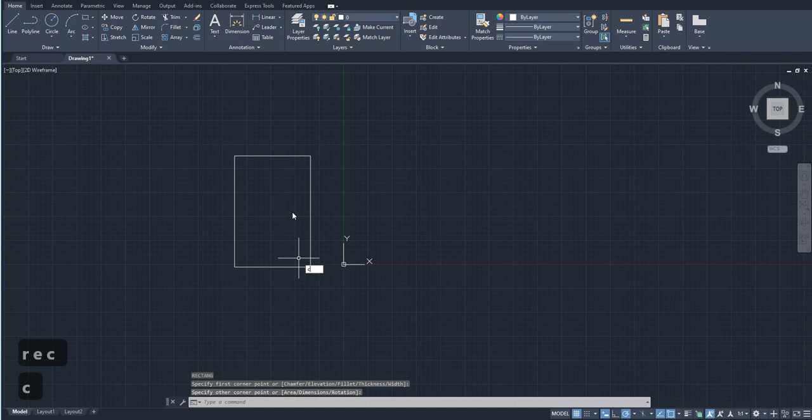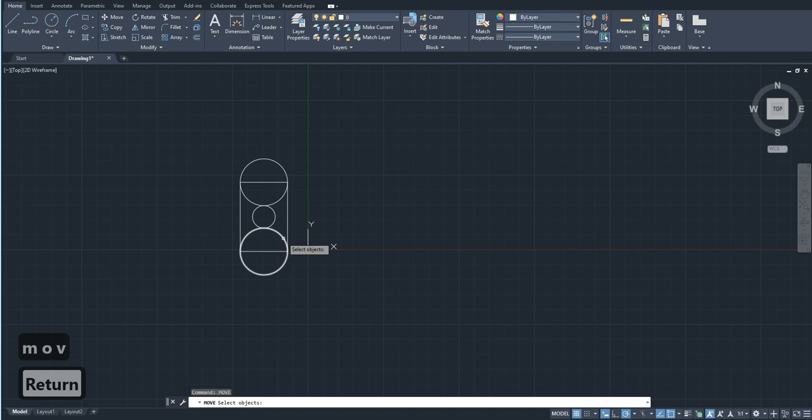To show you the first command, move, I'll create a random object on screen. Say I have this object and I want to move it. What you can do is select this command from here, or enter the command using the keyboard: move. It's asking me to select the objects. I select them, then press enter or spacebar.

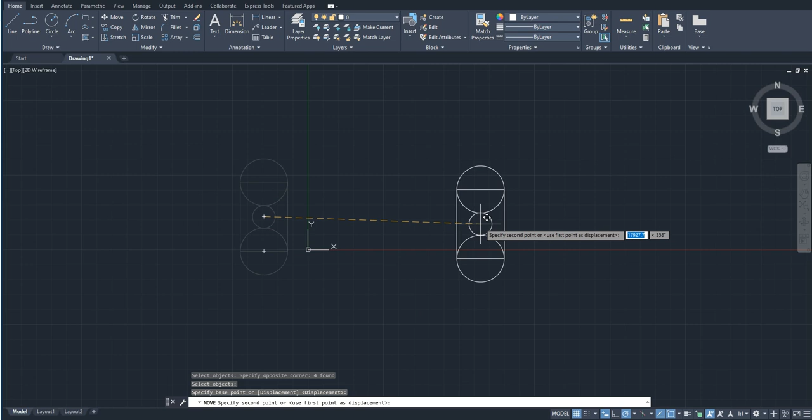AutoCAD assigns similar function to spacebar and enter, so you can use either. I personally prefer the spacebar, so I press it, and now it's asking me to specify the base point. Say I specify the base point as the center of this whole figure, and I can move the object wherever I want. So this is the move command. Just press escape to end it.

The next command is copy. It's pretty similar to move. I select it from here, or enter it, select the objects, press enter, and specify the base point. The only difference between move and copy is that copy retains the original object.

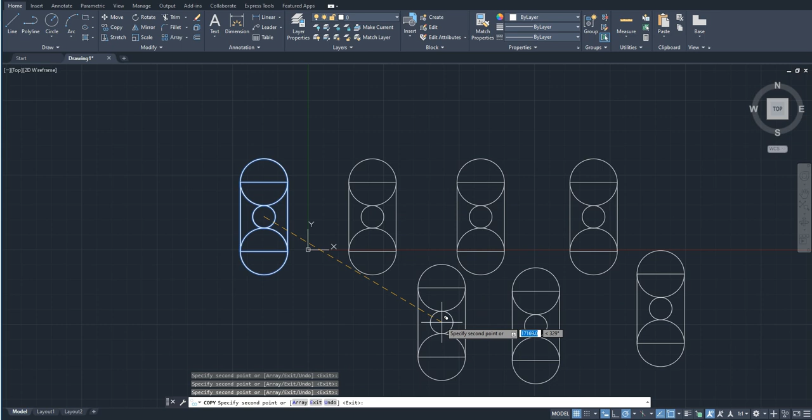So you can copy this object as many times as you want. I'm just going to press Ctrl+Z.

I'm going to show you another use of the copy command. I'll activate it again, select this object, press enter, and show you the array command. First I'll specify the base point. I'm sorry, I messed it up. I'll use the copy command again and specify the base point.

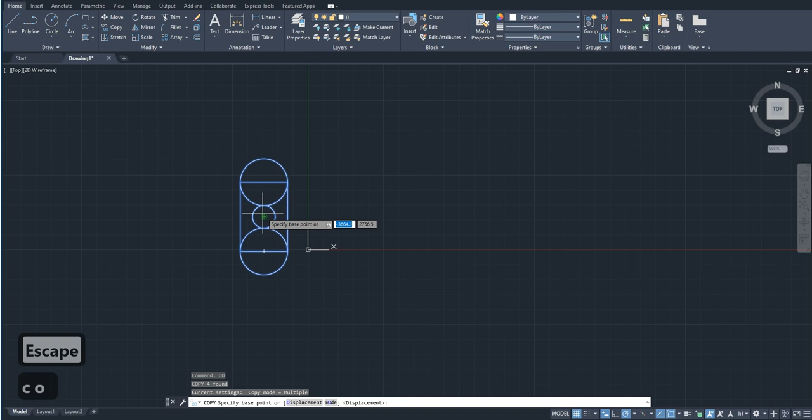Now I'm going to start the array command. It's asking me: copy, specify second point or array. I'll show you what array means. For that, I press enter. It's asking for the number of items to array.

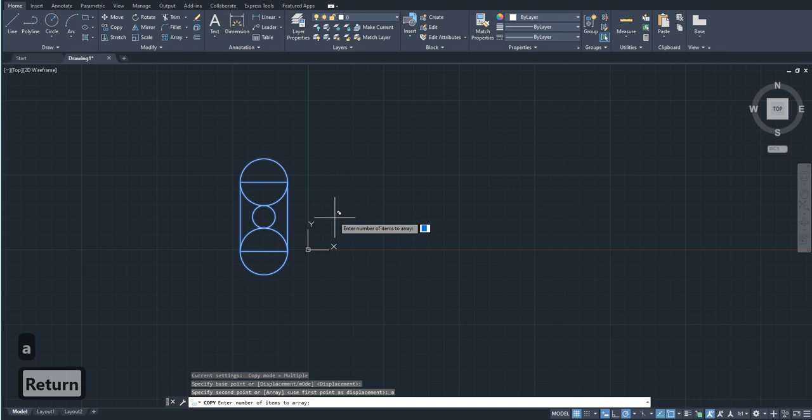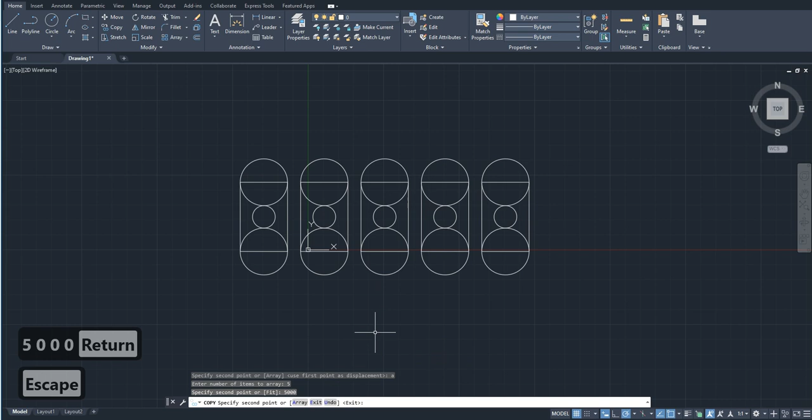Suppose I want 5 different copies of this object, so I enter the number 5. You see, 5 different objects have appeared. The fascinating thing is the distance between these objects remains the same, which I can enter manually as, say, 5000. So now we have the copy of the same object 5 times, equally distanced at 5000.

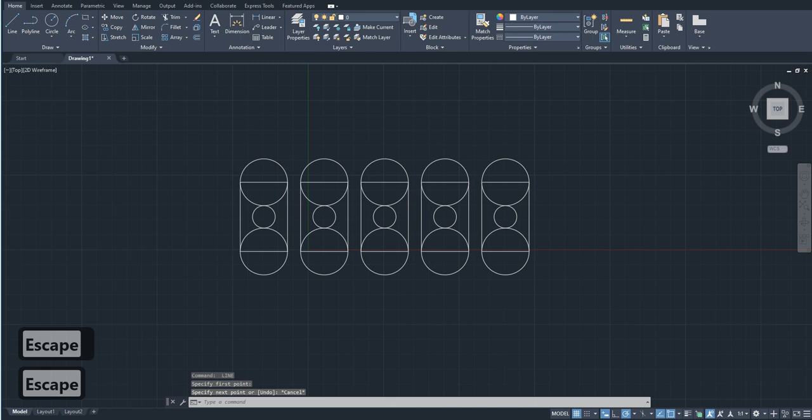You see the distances between the base points. For example, between these were the two base points of the object, so the distance is between the base points and not between the lines. That's how the array command works in AutoCAD.

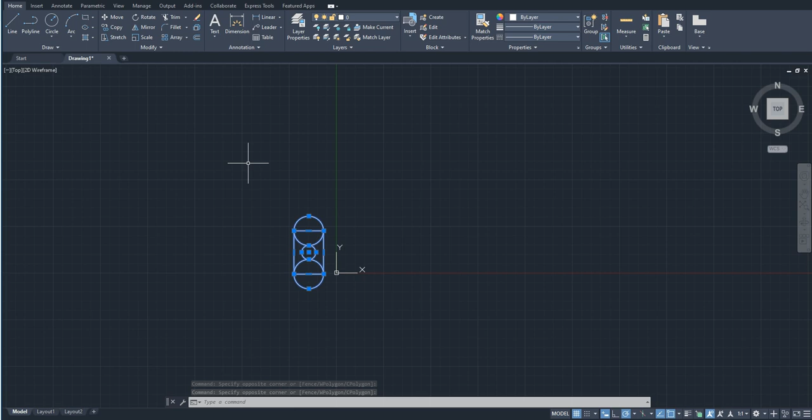The next thing I'm going to teach you is the rotate command. You can either select the object first and then select the command, or select the command first and then the object—it works either way. So I select the objects I want to rotate, then click the rotate command.

It's asking me to specify the base point. Say this, and you see I can rotate this object however I want. Say I rotated it to this. Now I want to make it horizontal again. Of course I could use Ctrl+Z, but suppose I want to make this particular line horizontal in this object—how do I do that?

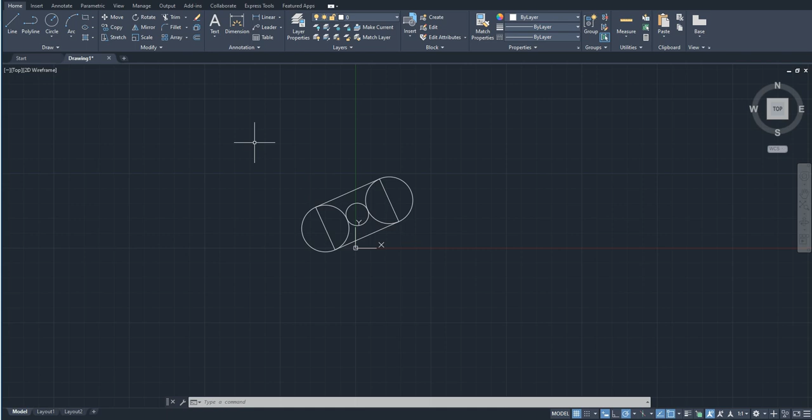Using the rotate command, I select this, enter rotate, select this base point. You see, no matter how hard I try, the polar tracking isn't working, because this object is rotated on a different axis. So now I'll have to enter a reference line.

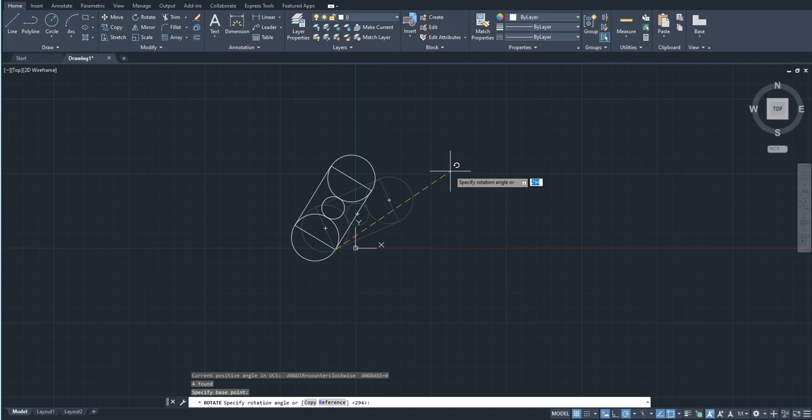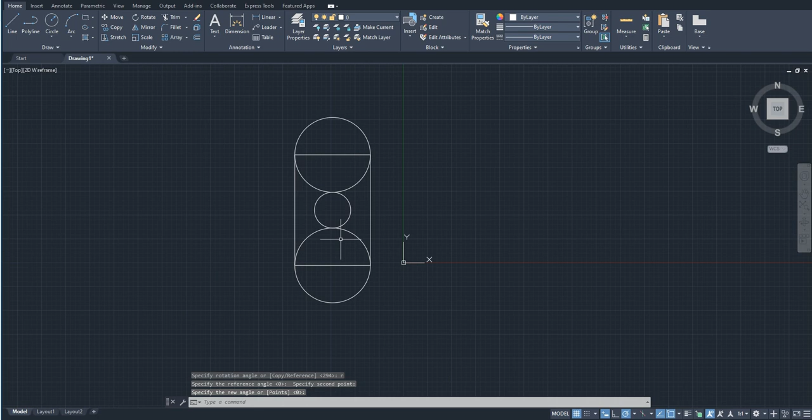For that, you just press R and press enter. It's asking me to specify the reference angle. Say I specify the reference angle as this. Now I can rotate my object according to this line, and now we have the object finally horizontal. That's how the rotate command works.

The next command I'm going to show you is the offset command.

The offset command is this small icon over here. This is my favorite command, I use it a lot. It helps to create concentric circles, parallel lines, and parallel curves.

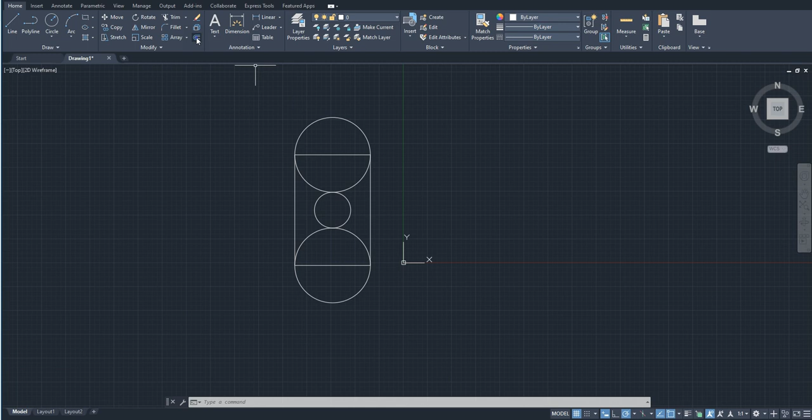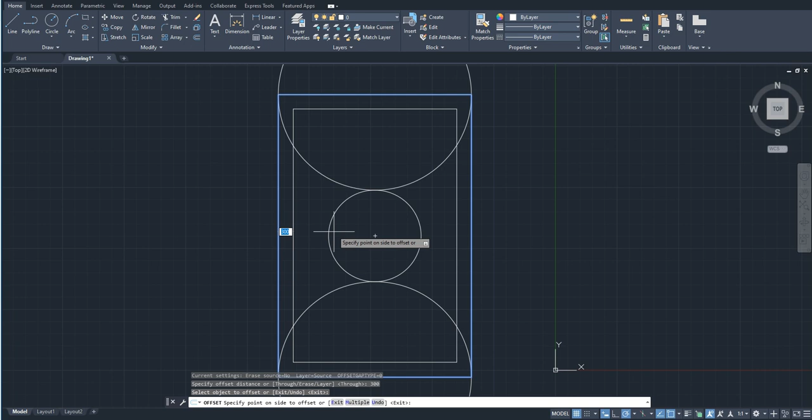So I'm just going to select this, and it helps to create an offset. Say I want a similar rectangle inside this rectangle at a distance of 300. So I specify the offset distance as 300 and press enter. Now if I select this object and hover my mouse inside this, another object is going to appear at a distance of 300 from the original one.

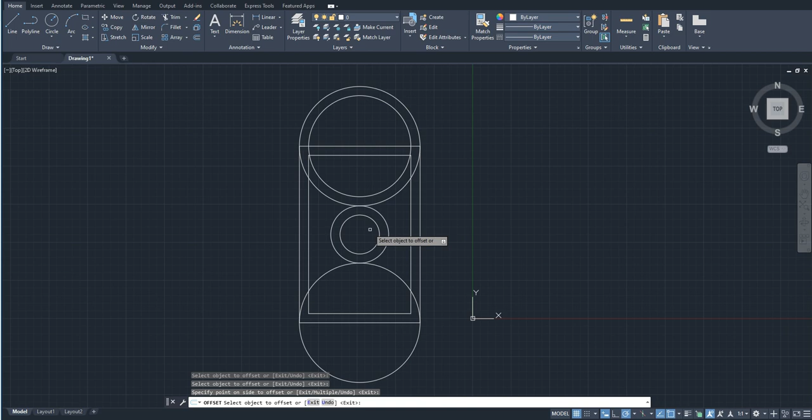And if I hover the mouse outside this object, it's going to offset towards the outside. So I can offset rectangles, circles, and basically anything. I can even offset lines, for example this particular line. If I use the offset command on this, we can also offset lines over here. I can offset it as many times as I want.

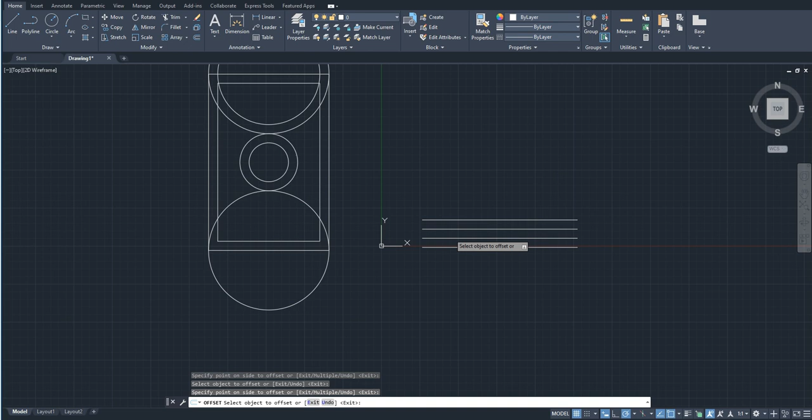The second thing I'm going to show you about the offset command is the 'through' option. For example, I have a line parallel to this particular line, and I enter the offset command, and specify the offset distance as through. For that I just enter T, enter, and it's asking me to specify the object, say this.

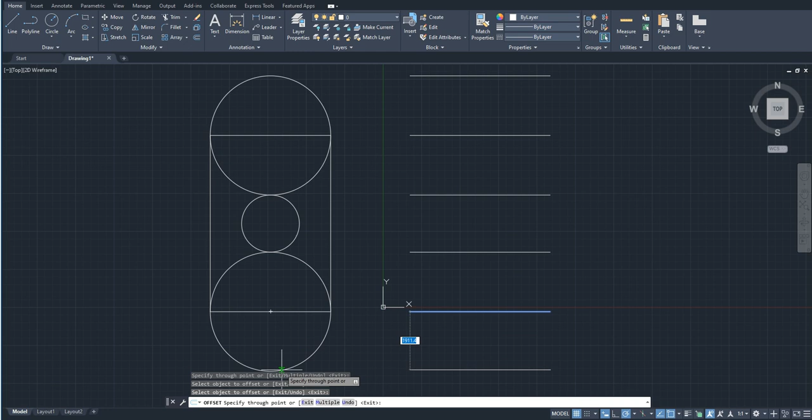Now I can select the object and specify the distance on my own, like this. So this is another use of the offset command, it's called through. That's all about the offset command.

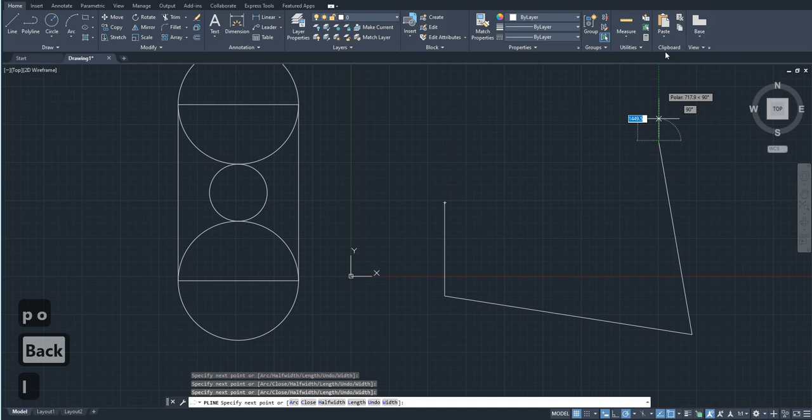The next thing I'm going to tell you about is polylines. We already discussed polylines, I just entered the command for that, P line. The offset command also works for polylines.

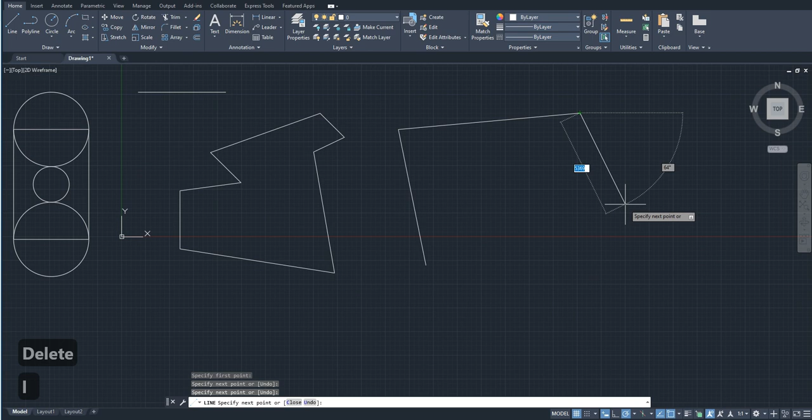Likewise, it works for basically any objects, but say this line is not a polyline, these are different lines. For example, I make a similar shape using lines, and then try to offset this. I'm going to have to offset it one by one. So just make sure that whatever object you're offsetting, if you want the complete offset of that object, it has to be a polyline or one singular object. That's only when the offset command works that way.

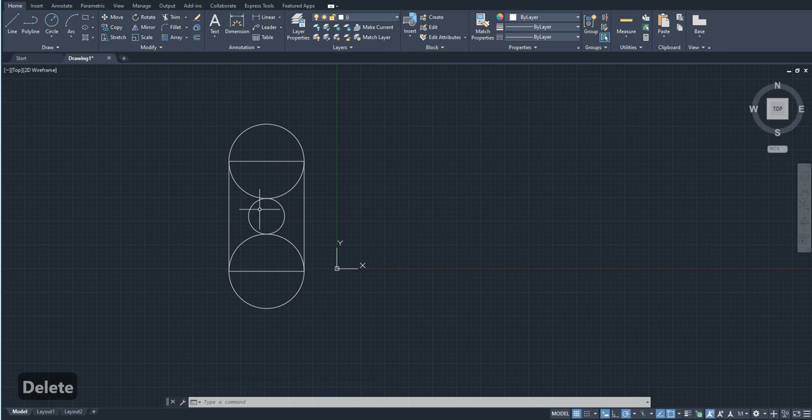The next thing I'm going to show you is the command trim. Let me just draw a figure. Let's say I want to trim these 3 lines, and I'm going to do it in one go instead of selecting this, clicking the endpoint, and putting it here - it's going to be a tedious process. So instead I'm just going to use the command trim. For that you can either go over here and click the command trim, or just enter TR, enter.

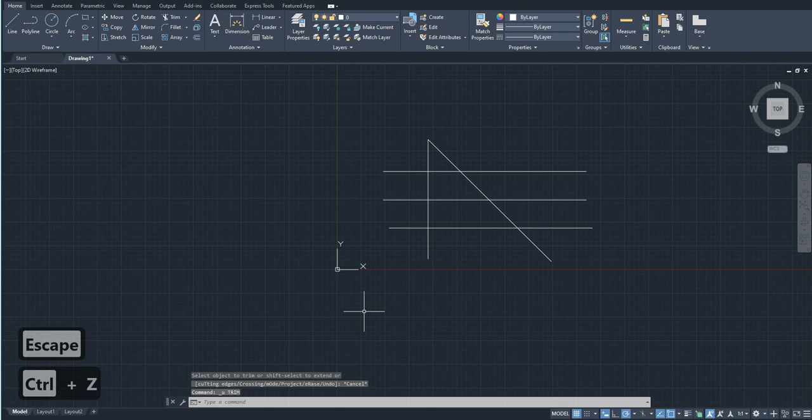Now my version of AutoCAD is AutoCAD 2022. If you're using versions below 2022, you're going to just have to wait a little bit. For people using AutoCAD 2021 and above, they can simply trim this using these commands - you can hover over the lines and it's going to trim them for you. For people using AutoCAD below the 2021 versions, don't fret, I'm just going to enter the command TR, enter.

For previous versions of AutoCAD, if you just enter T, enter, that's how the previous versions work. If you just enter the trim command, it's going to work like this: you're going to have to select the object from which you want to trim, or the objects you want to trim. So I'm just going to select these 3 objects, press spacebar again, and then trim these objects. That's how trim in AutoCAD earlier versions works.

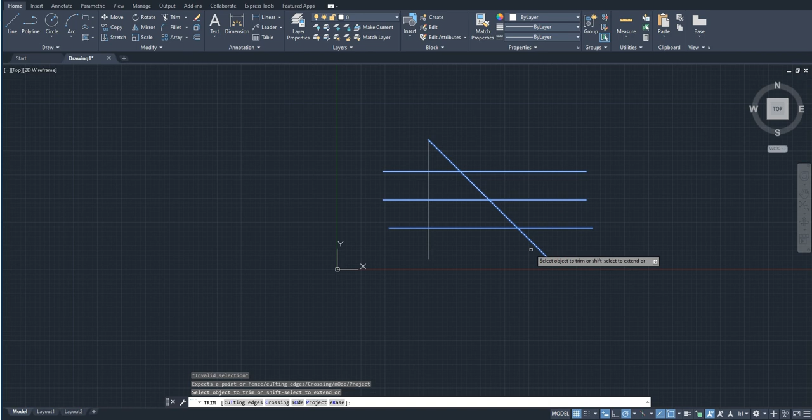But I'm going to show you another useful thing that the earlier version has. For example, I want to trim these particular lines over here, not these lines but the whole line. So I'm going to select the line from which I have to trim and the lines which are to be trimmed. I'm not going to select this particular line. Now I just use this command - you see, I don't have to trim this side and this side separately, it just trimmed the whole thing on its own. It didn't consider this particular line while trimming. That's the advantage of previous versions. So that's how the trim command works.

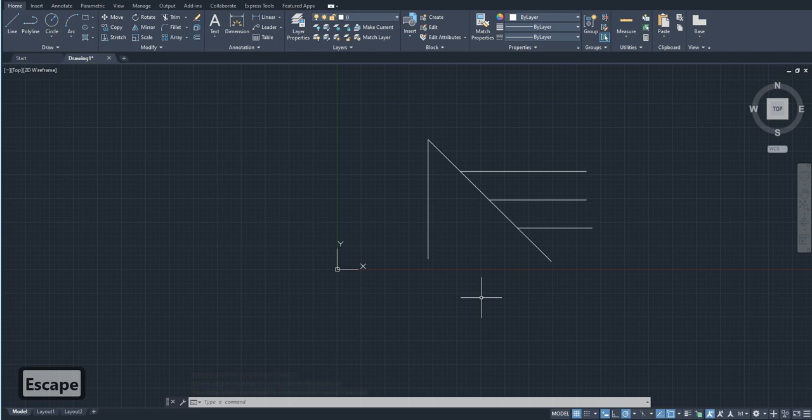The second thing I'm going to teach you is the command extend. For that you just select this, or you can use the command extend from here. It's asking me to select the objects to extend. I select these objects and just extended them to this particular line. So that's how the command extend works.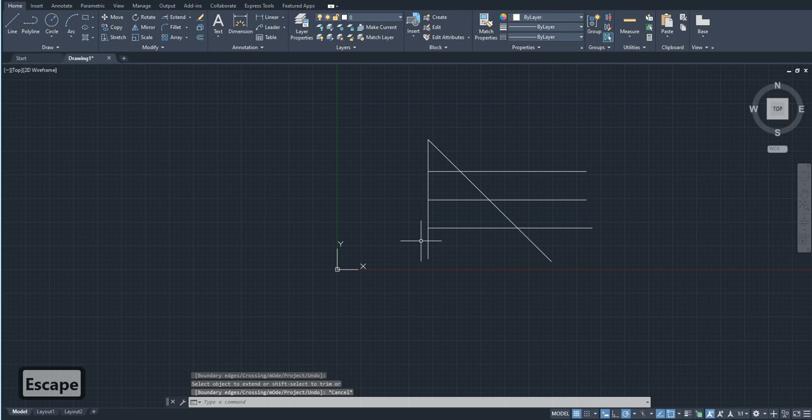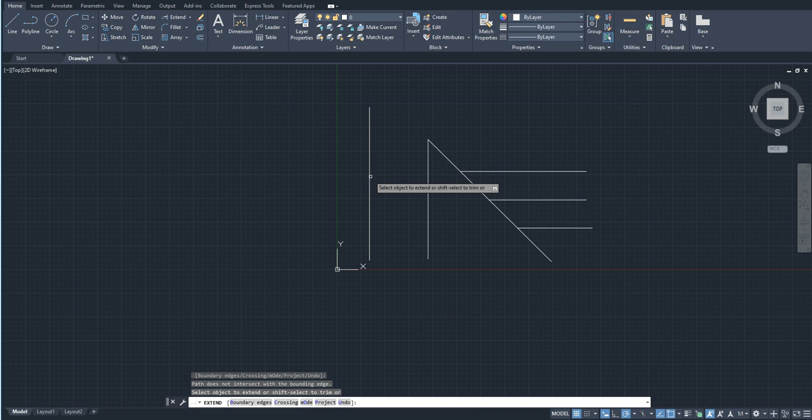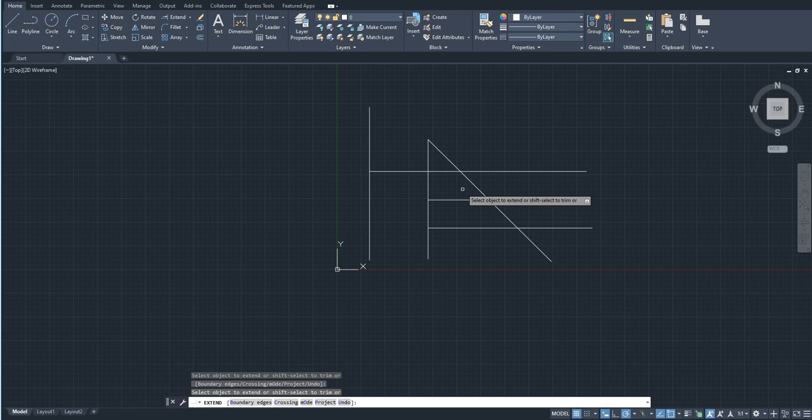But I'm just going to have to press Ctrl+Z to show you another application. Suppose I want these lines to extend till over here. For that I just select these lines, use the command extend, and select the object, I just select these lines, use the command extend, and select the object like this while double pressing it. So that's for the trim, and that's how the extend command works.

I think it's fairly easy. The next command I'm going to be teaching you is the command mirror. For that I'm just going to draw a random object, which is a rectangle, and another rectangle and a line.

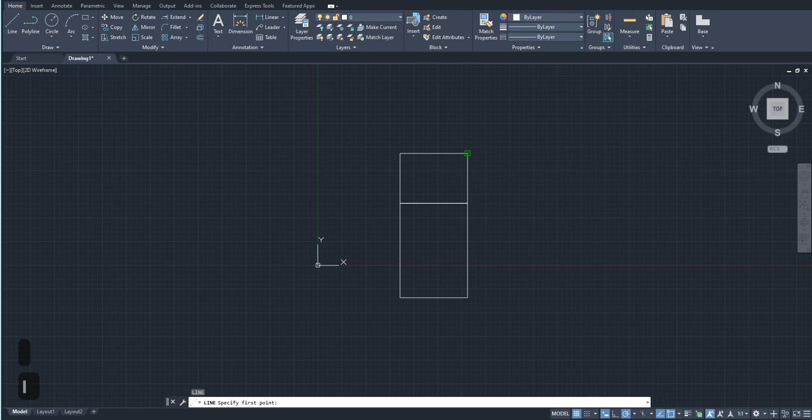Say I have this particular object and I want a symmetrical copy of it, basically a mirror image of this object. For that I just select this object and click on the command mirror.

It's asking me to specify the first point of the mirror line. Remember, if you're standing 5 centimeters away from the mirror, the distance of your reflection from you is going to be 10 centimeters. So if I want the distance between this object and its mirror object to be 5 units, the distance of the mirror line has to be 2.5 from here.

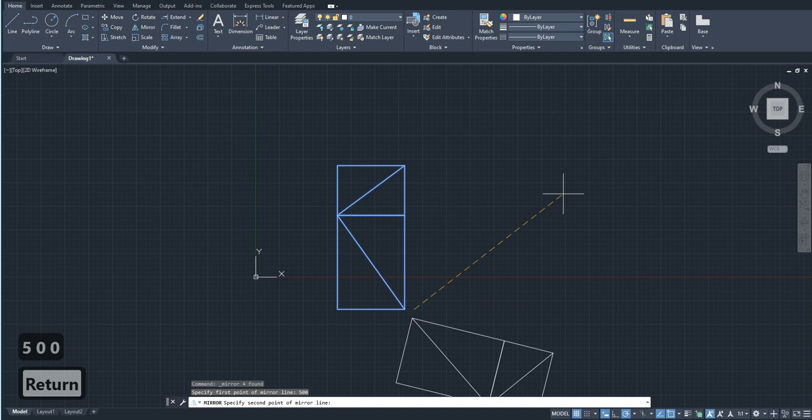Say I want the distance to be 1,000 units, the distance of the mirror line from this object has to be 500 units. So I hover my mouse over this area, click, enter 500, press enter, and you see the mirror line can go in different directions.

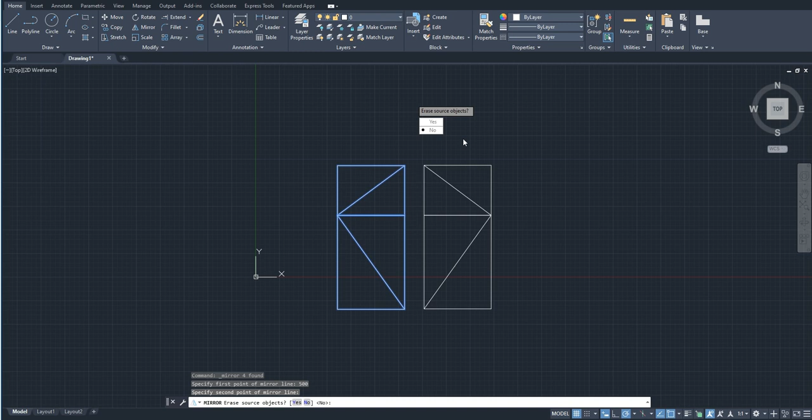I want it to be horizontal like this. It's asking whether to erase the source objects, and I just press enter because the command no has already been selected by default. That's how the mirror command works. You just have to imagine you're placing a mirror in front of an object.

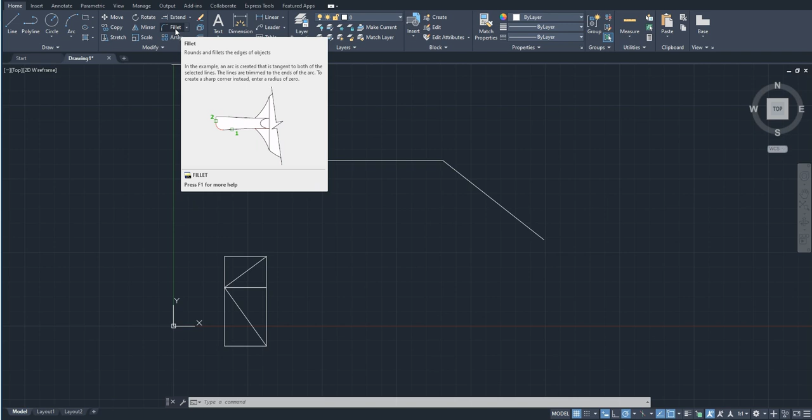The second thing I'm going to teach you is the command fillet. I'm going to draw two different objects, for example this line, and show you what fillet does. Fillet rounds and fillets the edges of objects, basically changing the edge of the object into a round shape.

I'll select this command. It asks me to select the first object, then the second object. If I zoom in, it did nothing, but that doesn't mean the command didn't work — it's because we didn't enter any radius. If I use fillet again, select my first object, and it shows select second object or radius. If I enter the radius to be 500 and select my second object, a curve appears.

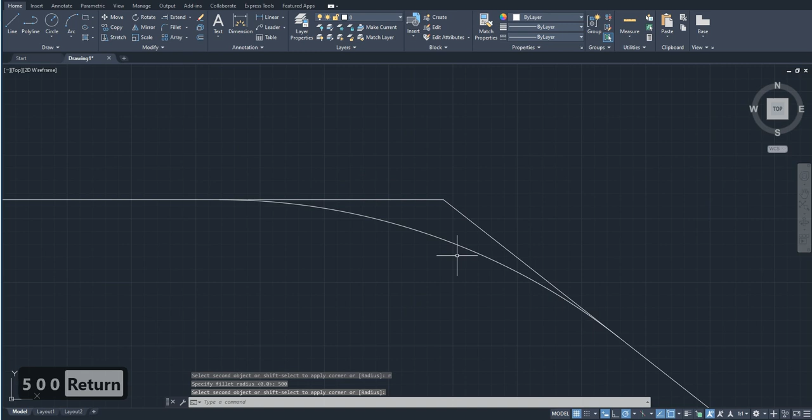Now suppose while creating this curved object I wanted this particular line gone — I only wanted the edges of this object to be rounded. So I erase this arc and enter the fillet command again.

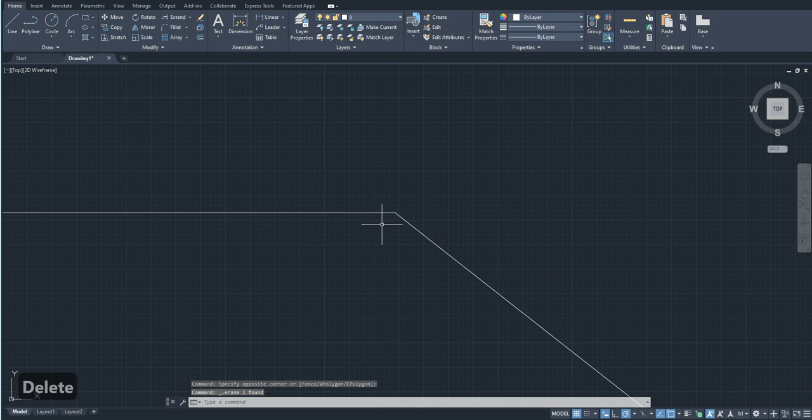This time there are 4 different options: polyline, radius, trim, and multiple. For now I'm going to use the trim command, so it's asking me to enter trim mode.

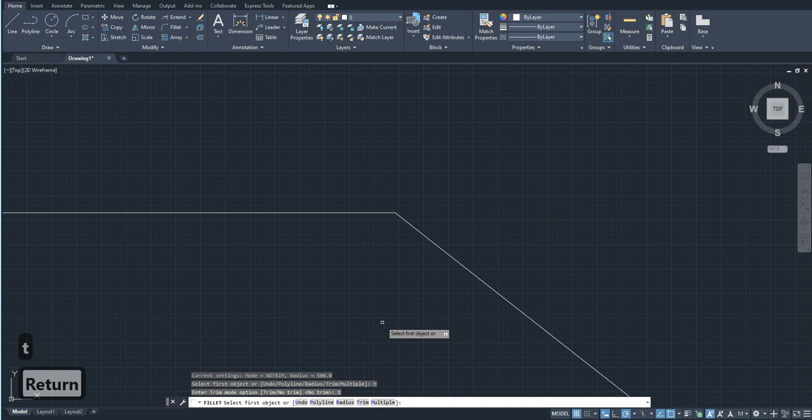If I enter T and enter, let's see what that does. I select the first object and the second object, and you see the corner that was appearing is gone now. That's how the trim command works.

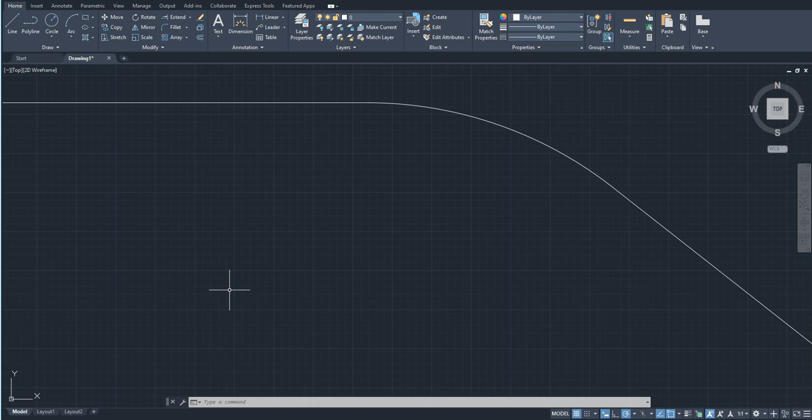Some people may already have the no-trim command activated, so I think you understood how that is. Just press Ctrl+Z again, and I'll show you other things about the fillet command. I enter F, enter, and it's asking multiple.

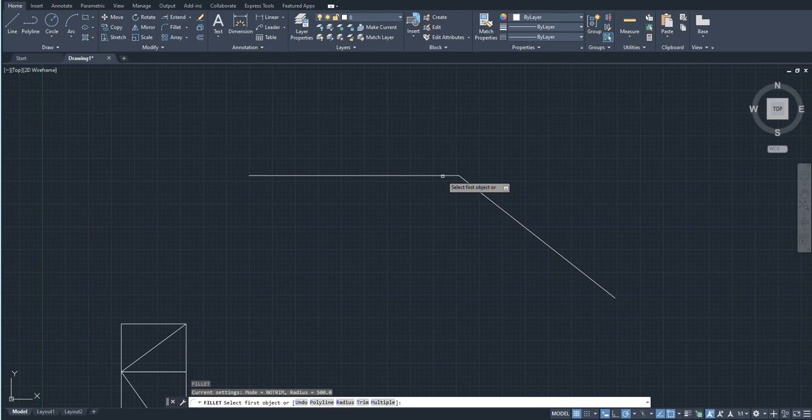Say I have this particular corner and these corners, and I want to change the shape of all of them. I enter M, enter, and select these objects. I keep selecting them and they're going to change their corners.

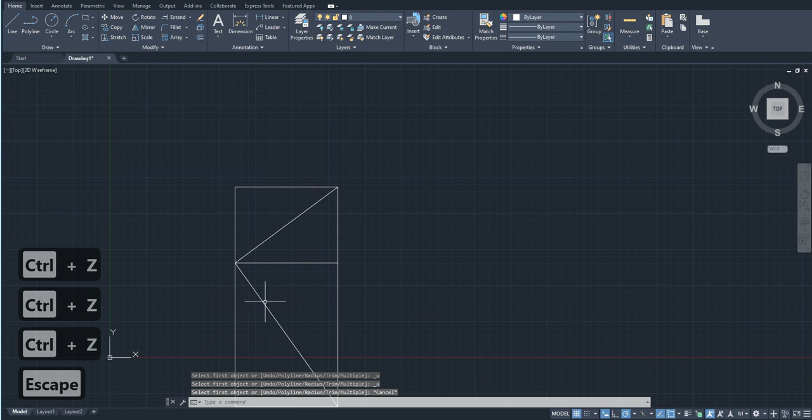But to do this very quickly, I had this as a polyline — this particular thing is a polyline, and so is this object. So to do this more quickly, I enter fillet and this time use the polyline option. If I select the polyline, it creates corners over the whole polyline.

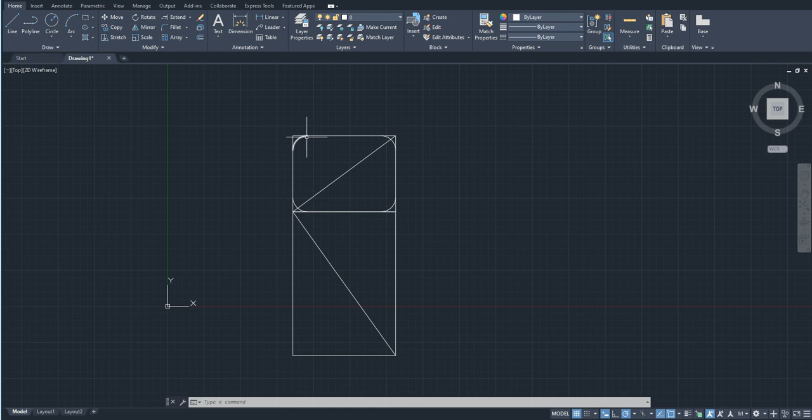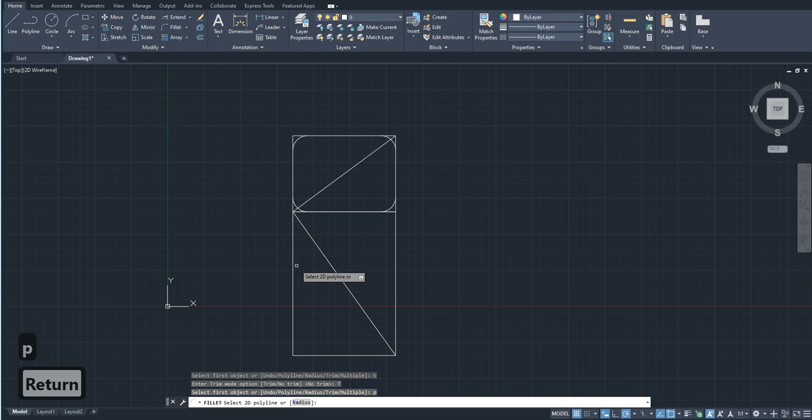If I have the trim command activated in this — T, enter, trim — and then activate the polyline command, selecting this makes all of it a polyline, even the corners and rounded arches. Instead, if we have no-trim activated, the arcs are separate and this line is different.

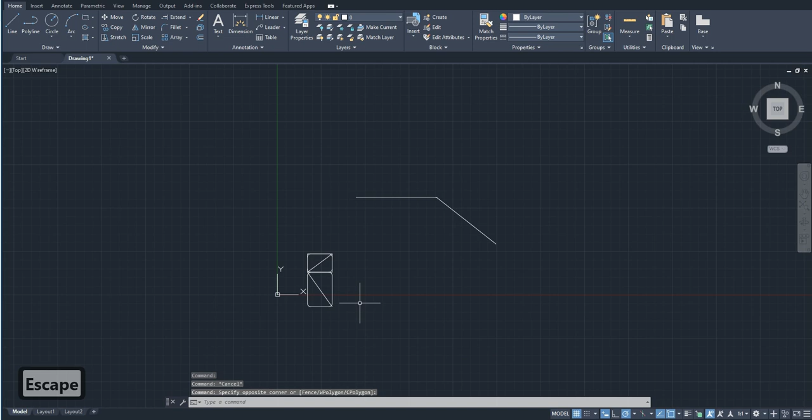So I hope you understood what the fillet command does. Next, I'm going to show you the chamfer command. The fillet command is similar to chamfer — in fillet we have an arc instead of a corner, while in chamfer there's a line instead of a corner. I'm going to show you that, and for that I'll delete all these lines.

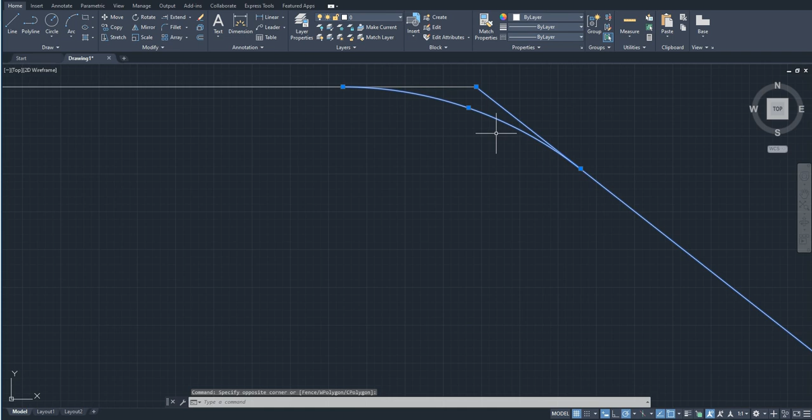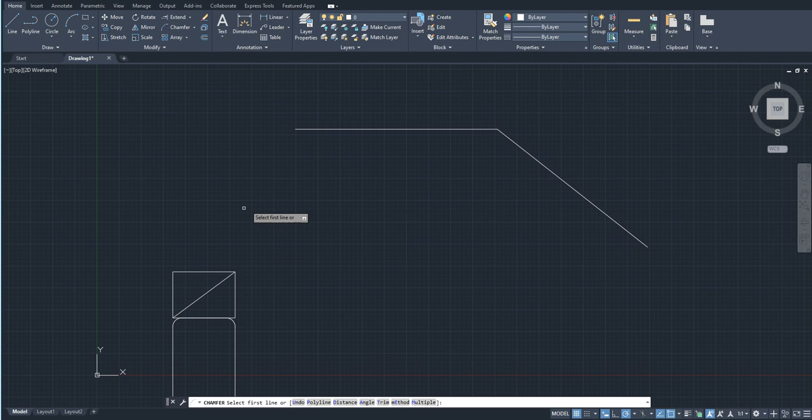So if I just use the chamfer command, the shortcut for chamfer is CHA. It's asking me to select the first line, and it's asking me to select the second line. Again, it did nothing because we didn't choose any chamfer distance. So I'm just going to select this command again, select the first line, enter the distance, D enter.

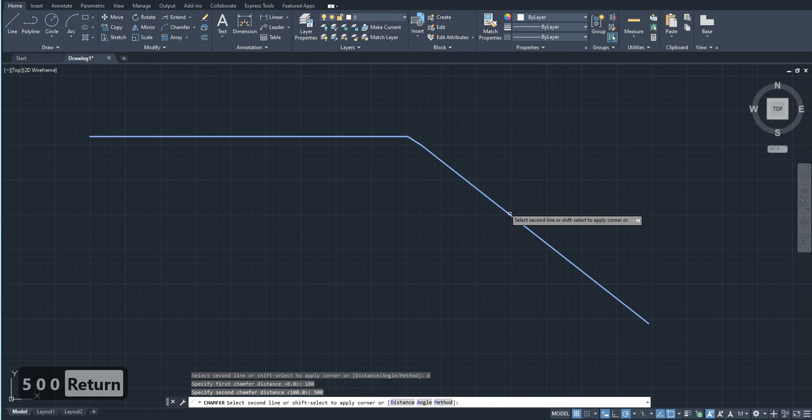It's asking me to specify the first chamfer distance. I'm going to specify it as 100, enter. The second chamfer distance I'll specify as 500 and enter. And if I just select the second line now, you see that a small line is appearing over here. The distance of this particular thing is 100 and this particular thing is 500. So this is how the chamfer command works.

If I just enter the chamfer command again, you can see it has similar options as that of the fillet command. It works in a similar way. I hope you just practice on your own and understand how these commands work.

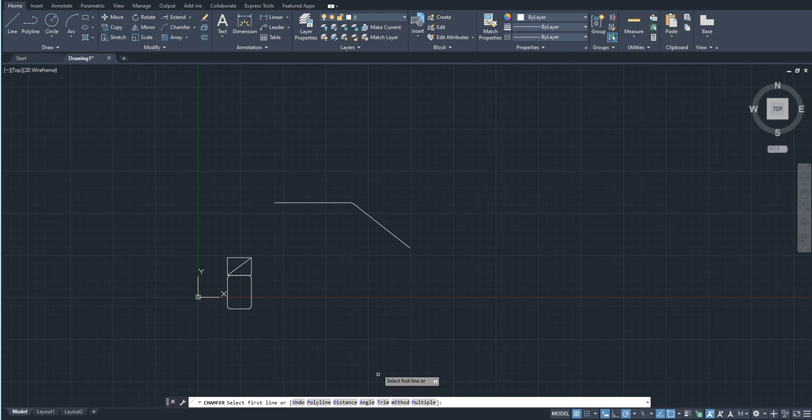Except that what you have over here is the angle. So over here I specified the distance initially. I can also specify the chamfer command using the angle. If I just press A, enter, and if I just enter the chamfer command, if I select the first line and I just enter the angle, it's asking me to specify the chamfer length, 200.

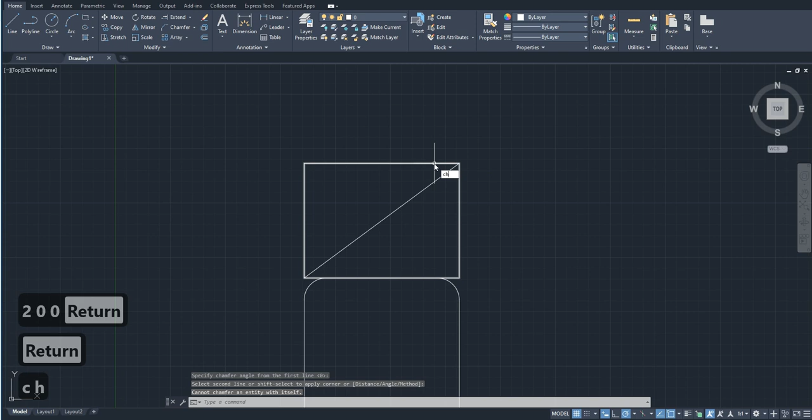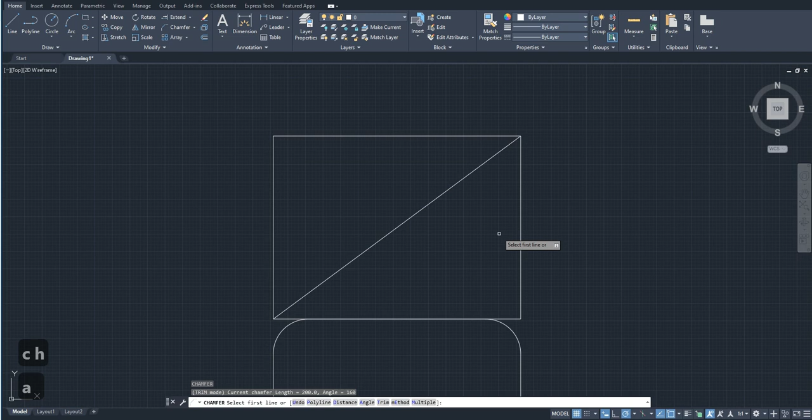Now if I enter the chamfer command again and I select my first line and enter the angle, say I select the angle of 45 degrees for the first one and 45 degrees for the second line and select this, you can see it's selected 45 and the second angle is also 45.

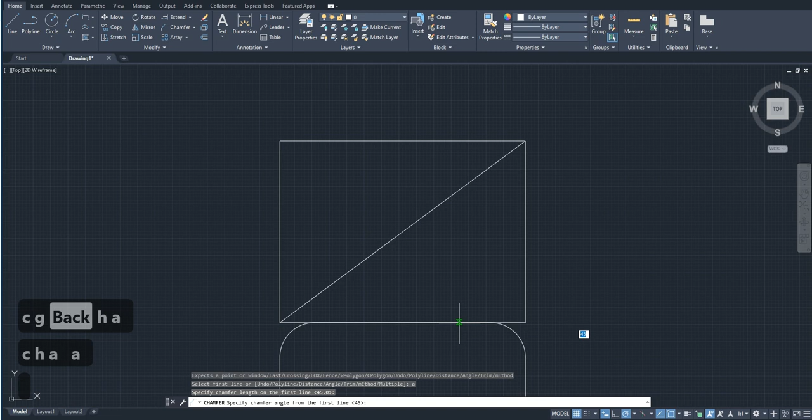So just press enter and select this. You see the angle of 45, it's chamfered at an angle of 45 degrees. The angle from here to here is 45 and the angle from here to here is also 45.

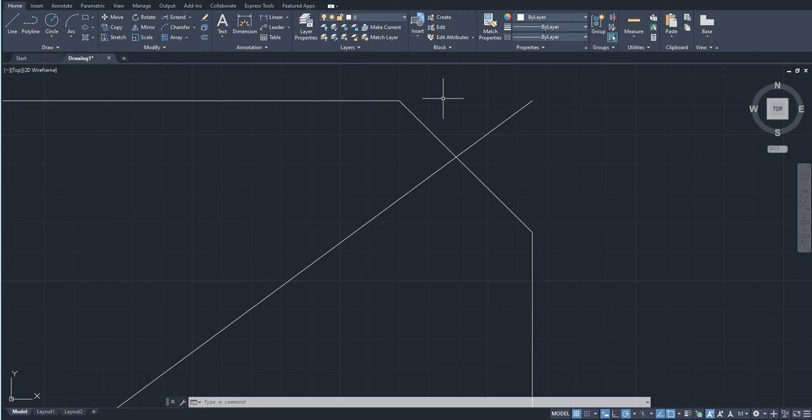So you must make sure that if you have this particular angle at, say, 90, the other two angles should also add up to 90. I'm not here to teach you maths, you can understand those angles by yourself. The 45 angle is basically the angle of this imaginary line and this line, the chamfer angle. So that's how the chamfer command works.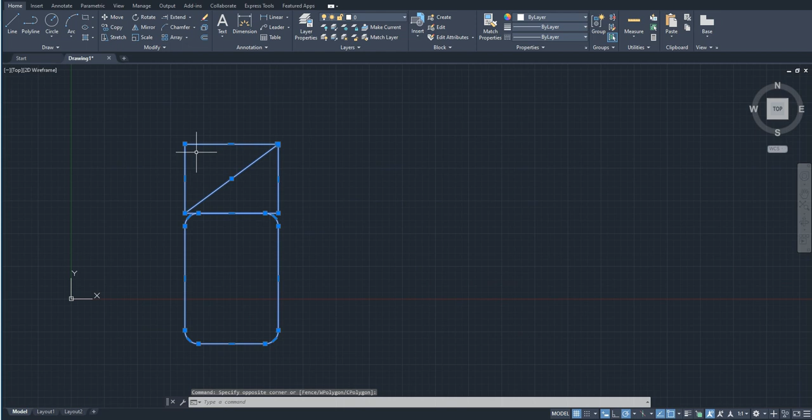The final command in this video that I'm going to show you is the scale command. The scale command is a pretty widely used command. For example, if I have this particular object, I'm just going to delete this and make a new object over here. I make this rectangle over here.

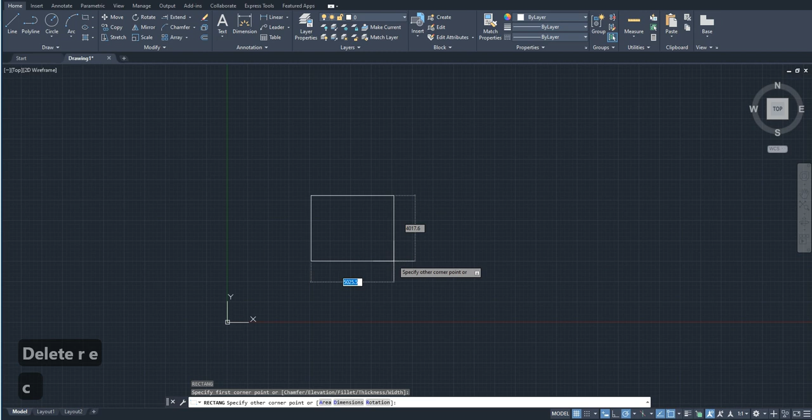I have the dimensions of, well we have random dimensions, I'm just going to enter a rectangle with specific dimensions this time. Say I have 5000 by 4000. So over here we have a rectangle like this with the dimensions 5000 by 4000.

So that means that the rectangle is going to be 2 times its original size. I'm just going to press 2 and enter. So the rectangle has been scaled to twice the size.

The next property of the scale command would be, suppose I have this rectangle and I want to scale it, and I specify the base point as this. Now you can see that I have an option of reference here. So if I enter R, it's asking me to specify the reference length.

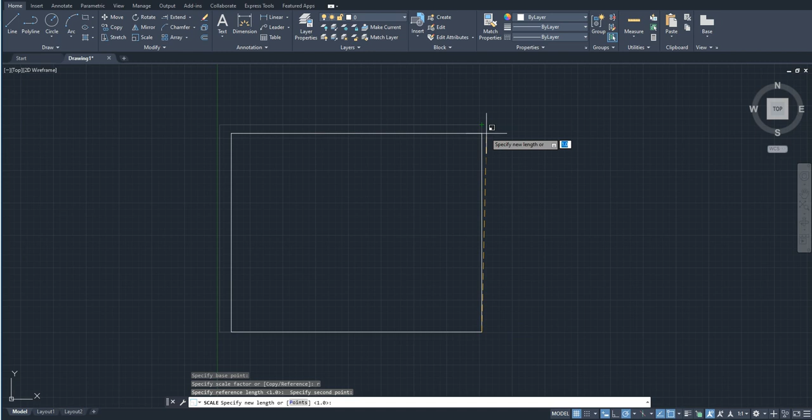Suppose I want to change the dimension of this particular line in an object to say 200, and I want to scale the entire object according to that. I don't want to calculate the scale factor for everything, so I'll just use the reference length. I want this particular length to be 200. I select this, I press, it's asking me to specify new length. Now I want this length to be 200, and I press enter. So the whole object is scaled according to that particular length now.

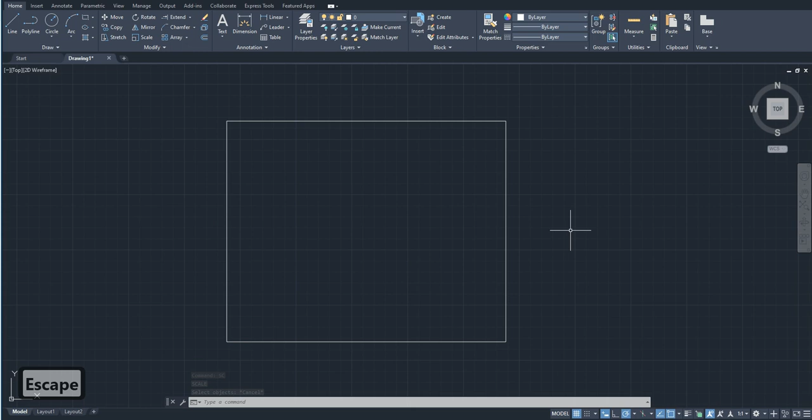So that's how the scale command works. If you want to know if you scaled this object perfectly, you just enter the command DI, it is the command for distance. This line is now 200 and this line is now 250. So the whole object is scaled according to what you wanted.